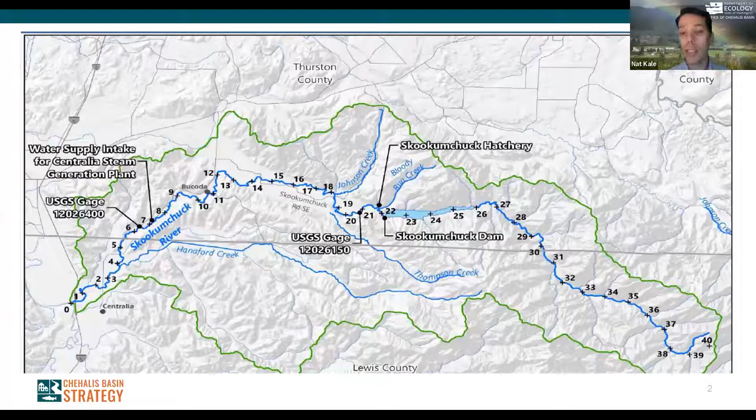So the Skookumchuck Dam is an earthen dam on the Skookumchuck River at about River Mile 22. It's approximately halfway down this 40-mile long river. The reservoir extends about 4 miles upstream of the dam, and about 10 miles downstream of the dam is the town of Bucoda, and another 8 miles or so downstream from there is the city of Centralia. The Skookumchuck Dam is really a delicate balance of 3 things: water supply, migratory fish, and downstream flooding.

The dam was built in 1970 for water supply. When it was built, it was to supply water to the Centralia coal-fired steam generation facility. That facility is shutting down their second and final turbine in 2025. Last year, TransAlta, the owners and operators of the dam and the reservoir, worked with the Department of Ecology to create a water bank. This allows them to essentially sell the water that used to go to the generation facility to other users, like the cities of Centralia and Chehalis, or other downstream consumers of water.

The Skookumchuck River has been home to runs of migratory fish for a very long time. Steelhead, coho, and spring and fall chinook all use the river. Back in 1970, when the dam was built, the then Department of Fisheries required mitigation for the impact of the dam on the fish. The two big things that they required were a hatchery and a fish passage facility.

The hatchery still operates and raises steelhead and coho. Adult fish passage upstream of the dam is done by truck. Recently, upstream transport has been intermittent, with only steelhead being trucked by the Department of Fish and Wildlife and only in some years.

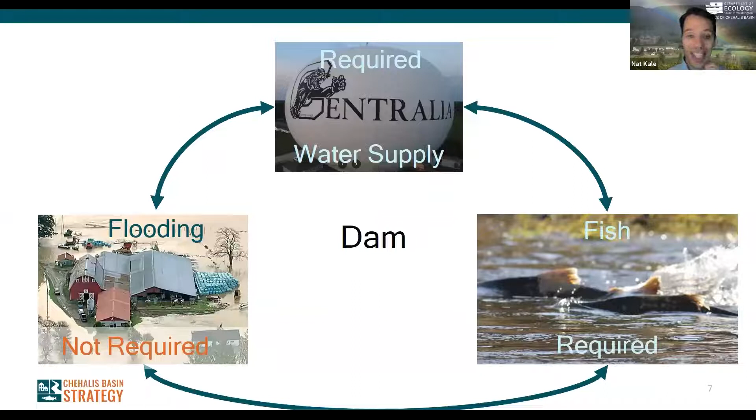So TransAlta operates the Skookumchuck Dam by balancing those three needs. They make sure there's enough water all year round to supply for their water rights, including their own rights. And they also make sure there's enough water and cool enough water for fish to use the river. And while the dam isn't operated for flood reduction, and it's not required to be operated for flood reduction, sometimes the reservoir is low enough in the fall that it does reduce downstream flooding.

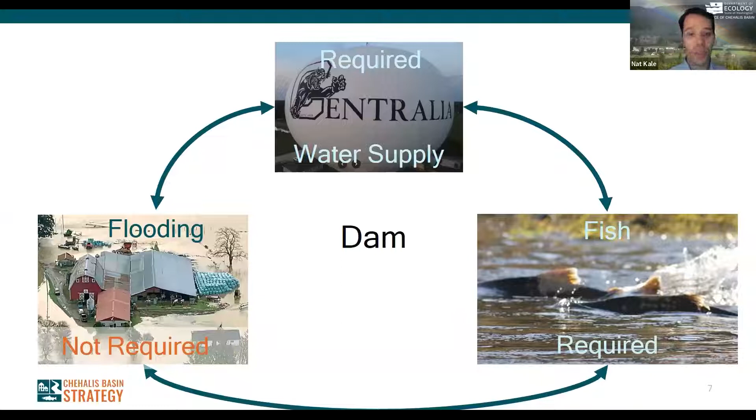The Office of Chehalis Basin, which I work for, is tasked with reducing flood damages and improving aquatic species habitat. Our goal with this project is to figure out how we can strike the best balance between these three things, reducing flooding in Bucoda, Centralia, and in between, while at the same time improving the river for Chinook, coho, and steelhead, all without disrupting that vital water supply the dam provides.

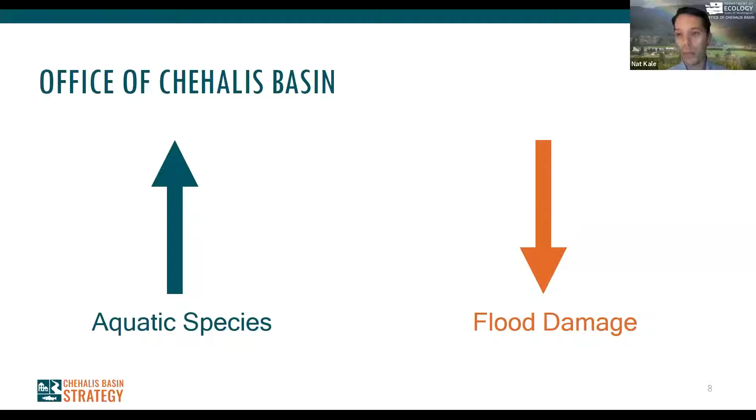Phase 1 of this study began back in March of 2021. We looked at historical studies of the Skookumchuck starting back in the 60s and gathered a lot of background information. Our focus was on getting a good understanding of the dam and on making short-term recommendations for the operation of the dam.

After we made a report to the board in October of 2021, we began phase 2 of this study. That's this phase. And for this phase, we've collected a lot more data and we're doing a lot more modeling. The outcome of phase 2 is going to be a report to the Chehalis Basin board, which should be done either late this year or early next year. That report is going to have everything we talk about today and a whole lot more. It's also going to have a few possible options of what we could do next with the dam.

I think it's important to say, I mentioned when I started that TransAlta owns and operates the Skookumchuck Dam, and they do plan to do so for the foreseeable future. They've been great partners with us on this project, and they're going to be the ones deciding what does and does not happen with their dam. So if the Chehalis Basin Board decides they want to move forward on a scenario for the dam, the first thing we'll be doing is going right back to TransAlta to start working on a mutually acceptable course of action.

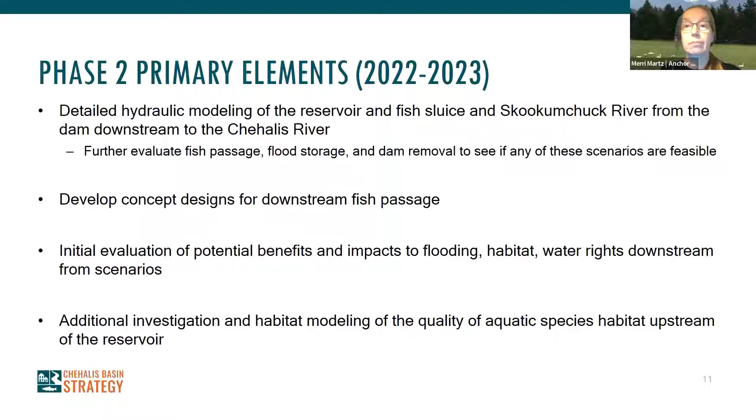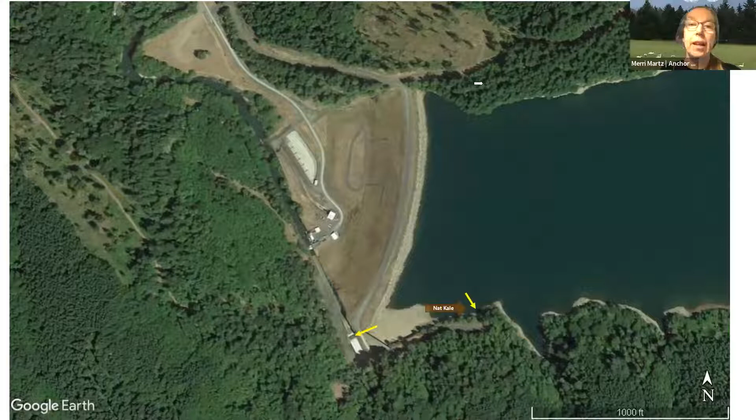And then the other arrow is pointing to the approximate location of a multi-level intake system that is the current way that basically all of the water discharges from the dam unless the reservoir is so high that it is spilling over the spillway. So that's basically the inlet and outlet system on the left bank of the dam.

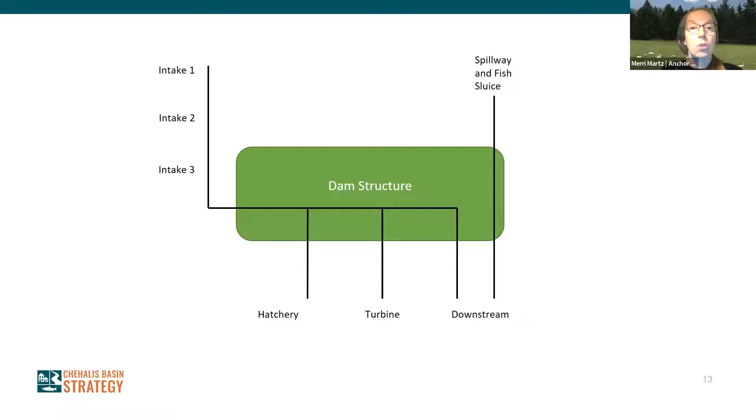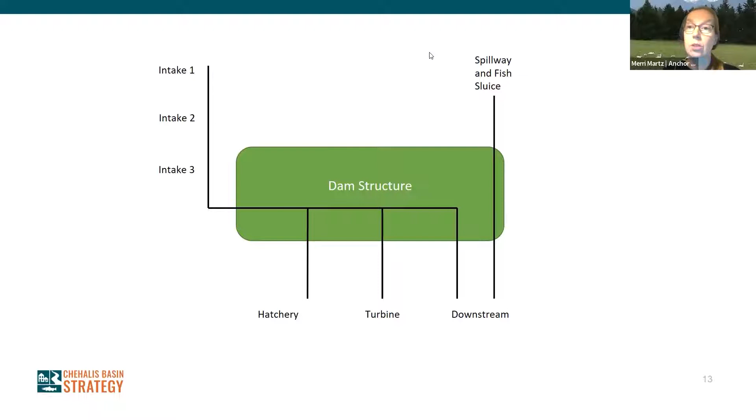And then there's this multi-level intake that can take water from various depths within the reservoir and discharge either to the hatchery, through the hydropower turbine, which is a small hydropower turbine, or to an outlet at the downstream end of the dam. So there's sort of three primary ways that water comes out: through this intake outlet system, or through the spillway and fish sluice, and all of the water that is discharged through these pathways enters the river downstream. Next slide.

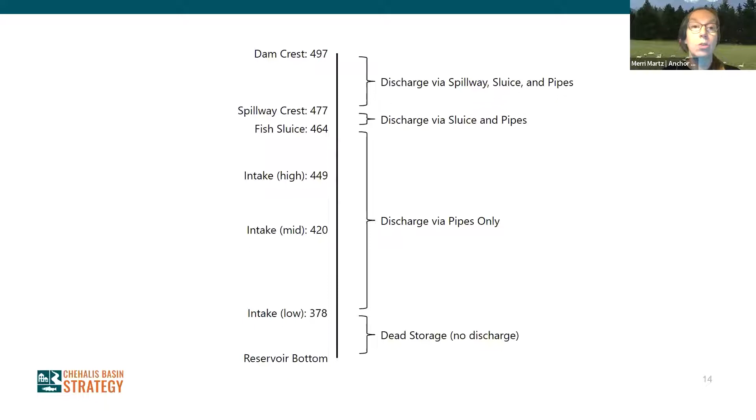The fish sluice that is built into the spillway has a bottom elevation of 464 feet. So when the reservoir is between the elevations of 464 feet and 477 feet, water can go through the fish sluice. When the reservoir drops below that point, there is no longer water going into the fish sluice, and so there would be no downstream passage once the reservoir drops below that elevation.

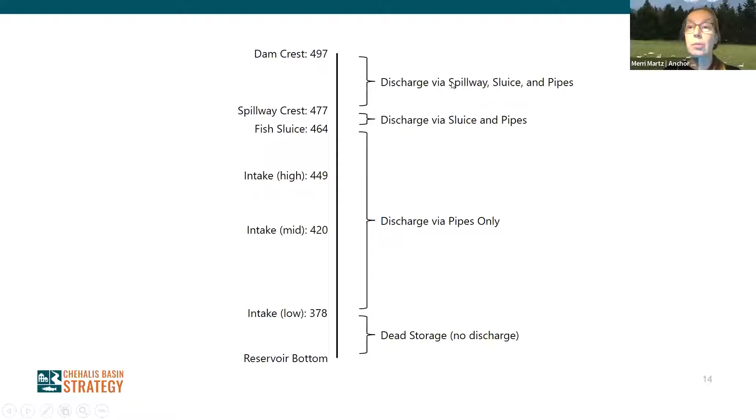And then, as I mentioned, there's this multi-level intake at various elevations, from a high down to a low at 378 feet. And then there is a bit of dead storage at the very bottom of the reservoir, below that lowest intake. Next slide.

So in phase 2, as I mentioned, modeling was one of the big elements of what we've been working on. And there were actually 3 different models. So there was a reservoir simulation model that allows us to route inflows coming into the reservoir from upstream through the reservoir and dam, and we can then analyze scenarios of different operations. So if there's X amount of flow coming in upstream, such as during a flood event, how could the reservoir store it and then release it downstream?

And same for fish passage. If there was certain flow coming in upstream, how long could you maintain elevation high enough to allow fish passage downstream?

We also built a 3-dimensional model for the fish sluice area in particular, because it allows a much more detailed look, because fish passage structures and fish that are using them are very sensitive to the velocities, potential eddies, and other things happening right in proximity to a fish sluice. And so it was really important to understand whether or not the existing or potential future fish sluice could be designed that would actually meet all of the state and federal criteria that have been designated that allow good fish passage.

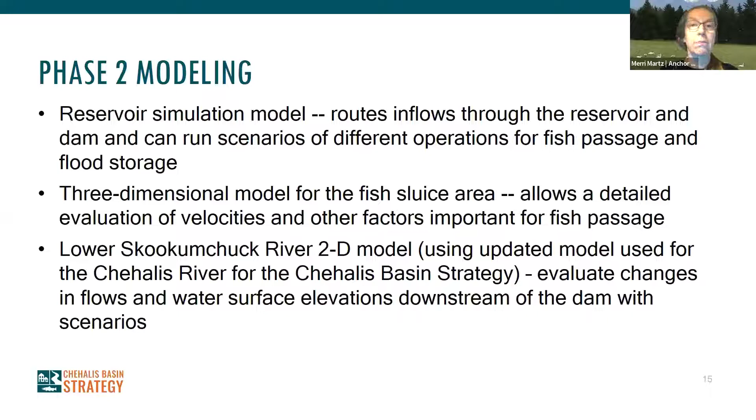So I'm going to focus now on the fish passage element. One of the first things that we have been doing in this year's study was to have several biologists evaluate the existing fish passage facility, the fish collection facility for adults. This was built at the same time that the dam was built, and it's intended to be used for adult fish collection and distribution, and the Washington Department of Fish and Wildlife operates it.

It's currently only used for steelhead, as Nat had mentioned, and what they do at this fish collection facility is collect fish for broodstock for the hatchery, as well as fish that are donated to various food banks in the basin, as well as potentially returning some fish downstream for additional fishing opportunities. And then they additionally trap and haul, in some years, adult steelhead upstream of the reservoir.

For its current purposes, it is effective. However, due to the size of the facility, if there were a lot more fish in the future that returned to the dam, and hopefully as part of the Chehalis Basin strategy there will be increasing numbers of fish in the future, there would need to be some upgrades in order to actually handle larger numbers of fish, or if we wanted to pursue passing other species such as coho and chinook upstream, there would also likely need to be some upgrades made. But for its current purposes, it is effective. Next slide.

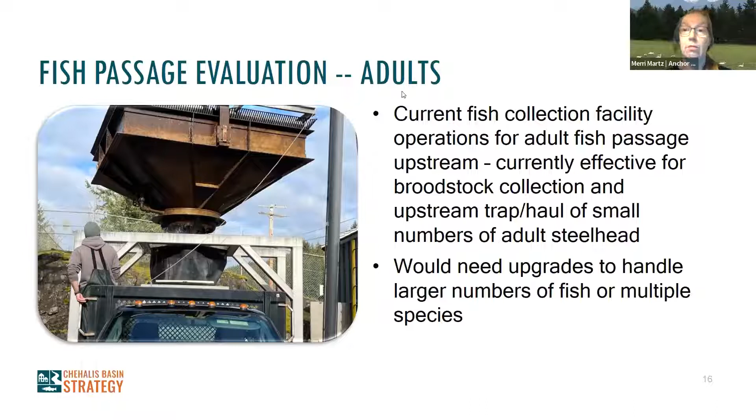So then focusing on juvenile passage downstream, coming from upstream of the dam downstream, we looked at the existing spillway and fish sluice. And this is a photo showing the downstream part of the spillway and fish sluice where they discharge into a long chute that returns through this slot back to the Skookumchuck River. And the current fish sluice does present some difficulties for safe passage. There's pretty high velocities coming out of the chute, depending upon what elevation the reservoir is at upstream. It's pretty turbulent. You can see all that white water coming out of the fish sluice.

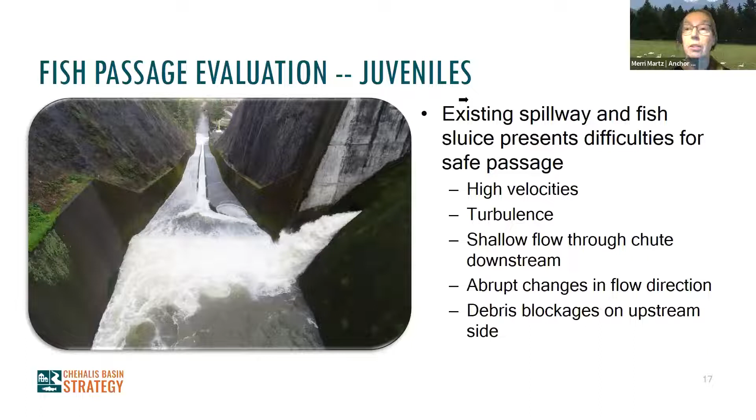And once the fish enter this chute that returns back to the river, there's very shallow flow. What is called in modeling is actually supercritical. It's really fast flow downstream. There are also some abrupt changes in flow direction as water comes out of the sluice and plops down into this holding stilling basin before it then goes into the chute. And depending upon the weather that year, if there are flood events that may have brought wood and other debris downstream from further upstream in the watershed, there could also be debris blockages on the upstream side that would reduce the ability of fish to even enter the fish sluice. So next slide.

So we looked at several options because the existing condition, while it certainly may provide some passage, definitely has challenges. So one option would be to modify this existing fish sluice. This photo is showing the upstream side of the sluice with the grating that is built into the spillway. You can also see in the foreground that there's a number of rocks and a channel that approaches the fish sluice. When the dam was originally built, this abutment was built into a bedrock bank slope, and this channel was blasted into the existing bedrock to allow a nice channel to approach the fish sluice. However, it does have some areas where there's possible eddies and fast flows that might disorient fish as they approach the fish sluice.

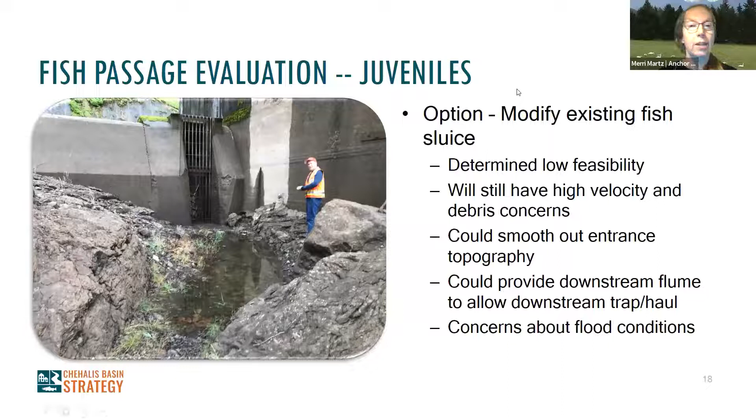And so when we were looking at the ways that this existing fish sluice could be modified, there's a lot of things that would have to actually be done. We could do some further blasting to smooth out that entrance topography, because to be most effective for fish to get into a sluiceway, nice smooth flows are the best way for fish to find their way through. We did also look at, if you did smooth out the top side, building something on the downstream end that would avoid having fish drop out in that fire hose situation into the stilling basin and chute. But that also poses some issues when water is spilling over the top of the spillway, that it could potentially damage what we're looking at downstream. The next slide shows a schematic of that option.

But as I had mentioned, when water is actually spilling over the top of the spillway, it certainly could hit this flume and might cause damage. And if there's debris being carried in the reservoir, that similarly could come over the top of the spillway and could potentially damage the flume. And so there are concerns about modifying the existing sluiceway, that there's a lot of challenges to that. So next slide.

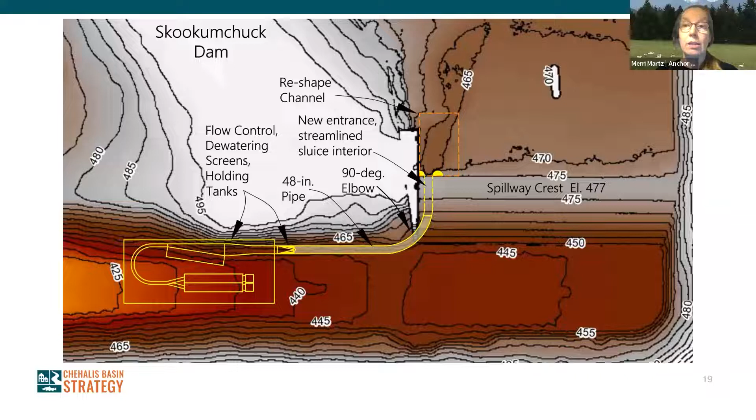So a second option would be you could build a new sluiceway that would be to the side of the spillway, which would eliminate some of those concerns about water spilling over the spillway and interfering with anything you're trying to do with the sluiceway. Similarly, it would require smoothing the upstream topography. It would also require boring a tunnel basically through the left dam abutment, which leads to currently some geotechnical and structural questions that have not yet been investigated, but it would require a new tunnel.

But based on the angle at which this sluiceway would go from the reservoir, we would be able to create better debris trapping and maintenance conditions. You wouldn't be right against the spillway, you'd be sort of to the side of it. And so you wouldn't have so many of the same issues with wood and other material coming through the spillway. And so this schematic shows a similar flume and holding tank, which is one option for how fish could then pass downstream via trap and haul. But there are other options as well. Next slide.

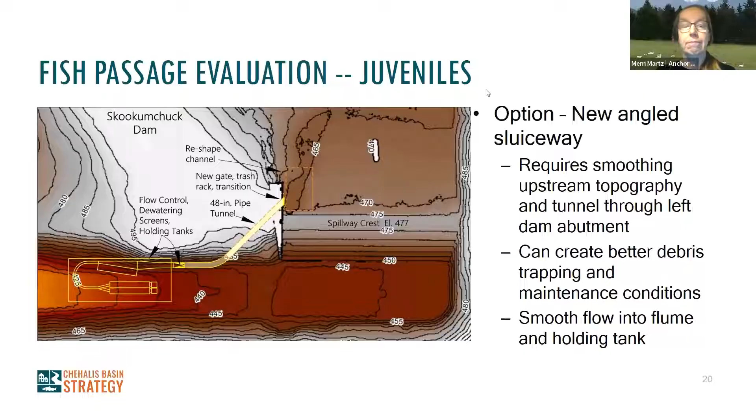So you could create a much longer flume that would just allow fish, once they entered the sluice, to continue passively downstream, just on their merry way through a flume system. This is used in many other dams, such as on the Columbia and Snake Rivers. There are long flume passageways that come out of dams, and they are highly effective. But you do have to drop down nearly 200 feet in elevation, and to meet current fish criteria, that slope of the flume cannot be particularly steep. It should only be about a 4% grade. And so it means that your flume to return back to the river is about 3,100 feet up to 3,500 feet, depending upon the pathway.

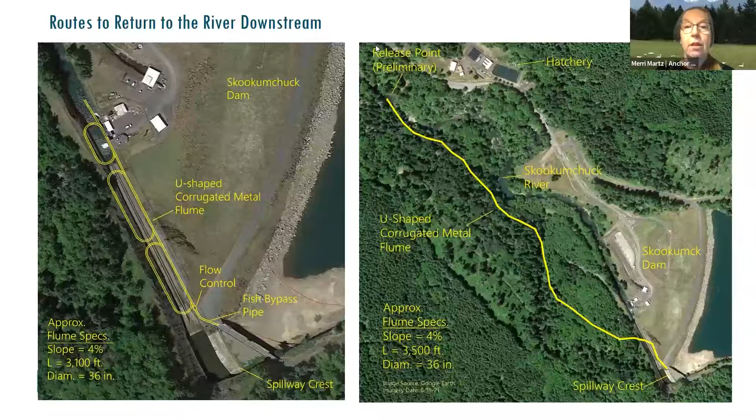So on the left photo, just showing a SketchUp of, you could do a helical way of turning and slowly dropping the elevation of the flume down within the existing chute, so you wouldn't have to go too far away from the dam. Or the second option on the right photo would be to create a flume pathway that returned all the way back down to the river downstream of all of the dam infrastructure. And that's another option. So next slide.

So using these potential fish sluice options, then there was reservoir simulation, and the three-dimensional modeling was conducted to identify, yes, could you actually make this happen, and what would be the effects? So for a fish passage only option, you would intend that much of the discharge from the dam actually goes through the fish sluice during the time period when you're wanting to operate it, rather than taking as much flow through the intakes and multiple outlet situations. So you try to keep the reservoir as high as possible and send most of the discharge through the fish sluice, so that you can have a longer period when it is passable for juvenile fish.

And so looking at this table on the left side, the left column, it says max discharge through sluice. So it's varying flows that we might consider passing through the sluice, from pretty high flows, 120 cubic feet per second, down to 25 cubic feet per second. And this was based on considering how much flow does it actually take to attract fish over to this corner? Like, how much flow would they actually notice and see a pathway downstream? Somewhere in this range would be sufficient to attract fish. In addition to discharging through the sluice, there is 20 CFS that is delivered to the hatchery pretty much all the time.

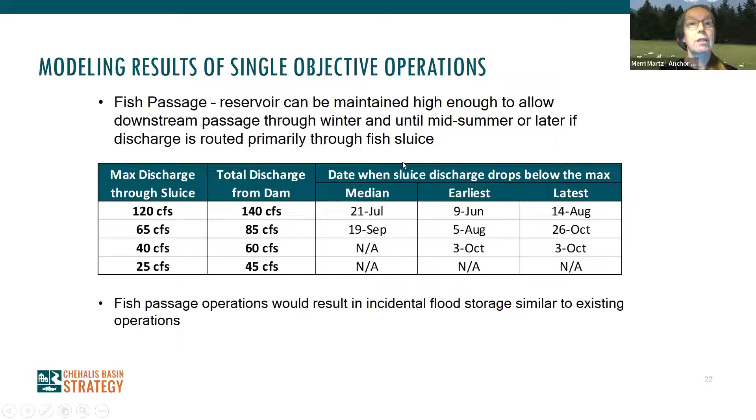So basically the takeaways from this analysis, and there will be some additional analysis to come, but currently, as I mentioned, the upstream passage for adult steelhead is effective, but there's clearly some upgrades that would need to happen to handle larger numbers of fish or other species. We have also asked another firm, the Whooshh firm, that operates those tube systems to transport fish over dams. They have also provided a conceptual analysis of what it would take to use their system to pass adults over the dam. So we're looking at multiple options.

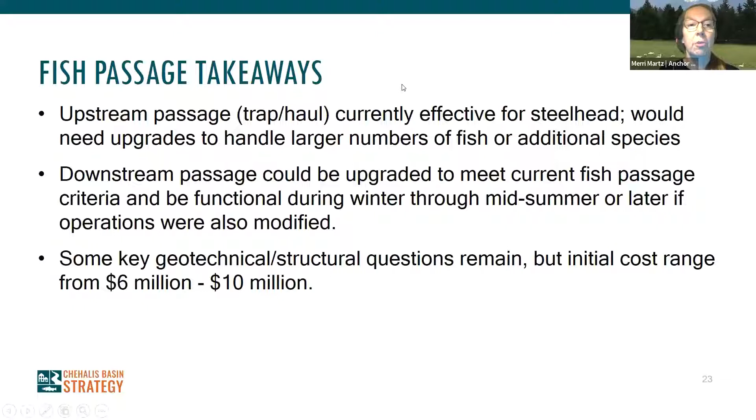Downstream passage could be upgraded to meet current fish passage criteria and be functional, basically from winter through midsummer or later, if operations were also modified. As I mentioned, if we proposed doing a new fish sluice through the left abutment of the dam, there's some key geotechnical and structural questions and concerns that would have to be investigated in a future design phase. But an initial cost estimate for a new sluice and flume system ranges from about $6 million to $10 million. Next slide. So with that, I'll pause, I think, for a couple of questions.

Yes, we have a couple questions going now. Our first question is, depending on the outcome of this discovery, would TransAlta entertain the idea of selling their dam and steam plant to the state of Washington to allow the state to manage this asset? Would you like me to answer that one, Merri? Yeah. The short answer is that option has not come up in our conversations about the dam or with TransAlta. So that's something that we would have to put to them and see if they were willing to entertain it.

All right. Next, we have, why hasn't the dam already been retrofitted with a more modern and effective fish passage system, such as those in place on many other rivers? Yeah, so the short answer is that the Skookumchuck Dam is not in the same regulatory jurisdiction and process that many other dams are in the state of Washington that are under the FERC process where they get relicensed every 50 years. The hydropower turbine that is present on the Skookumchuck Dam is small enough to be exempt from FERC licensing. The entire steam plant facility, which includes the dam to some extent, is under FERC jurisdiction, but Skookumchuck Dam has simply not had to go through some of the relicensing and upgrading and other considerations that a lot of other dams have had to go through in the past, because it's a little bit of a unique situation.

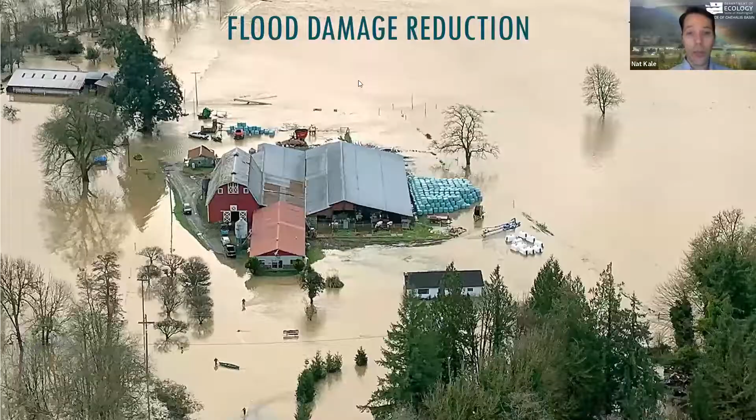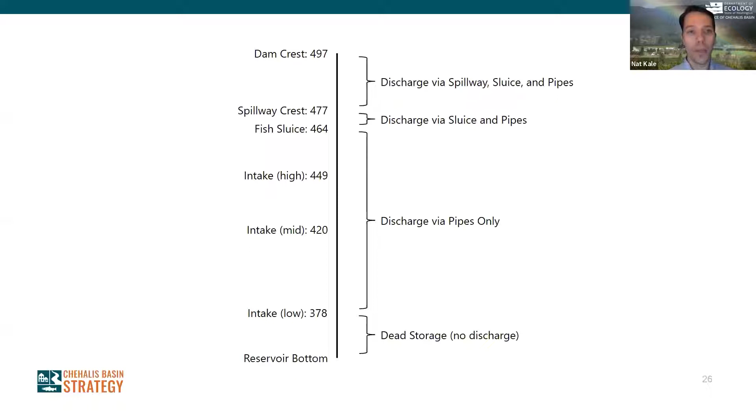At the Skookumchuck Dam, this means our goal for reducing flooding is to keep water from overtopping the spillway at 477 feet as much as possible. Basically, lower is better. We looked at both of the approaches that I mentioned to reducing flooding, increasing the reservoir's capacity and increasing the discharge capacity. And our computer modeling showed that a combination of the two would be the best way to reduce it. Now, in the past, the U.S. Army Corps of Engineers looked at increasing the height of the reservoir by adding gates or other structures to the top of the dam, and they found it really wasn't feasible to do that.

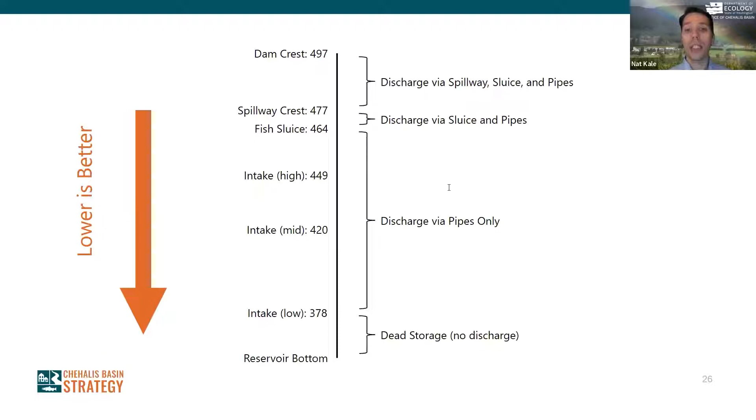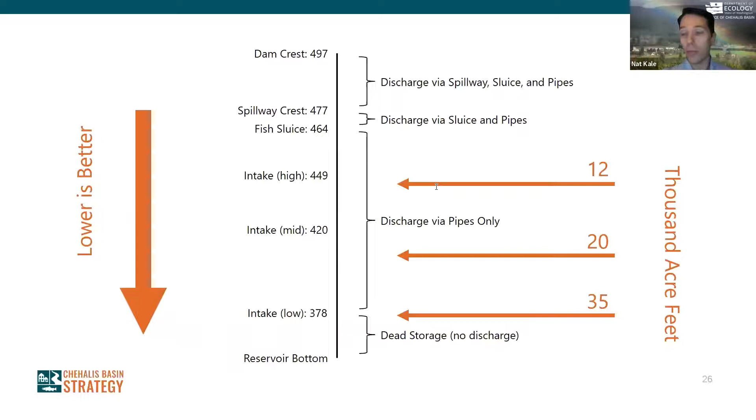So instead, we spent a lot more time looking at increasing the volume of water that the existing reservoir can hold back. We looked at 3 different capacities, and each of these corresponds to a different elevation in the dam. So those capacities were 12, 20, and 35,000 acre feet. And each of those volumes of water corresponds to a specific target elevation of the reservoir during the winter. So basically, instead of going up by building more space, we're going down by taking out more water. I'm going to be talking about acre feet a lot, so I'll just quickly give you this orientation here. An acre foot is just 1 acre of land filled up to 1 foot with water. So it's a lot of water. An acre is approximately 1 football field. So hopefully that's fairly easy to visualize.

35,000 acre feet is the maximum capacity of the reservoir. That's the volume between the top of the spillway, where the dam is no longer doing much, water is just running past it, and the lowest point at which we can take water out of the reservoir. That's called the active pool. It's the area of the dam that we can actually manage. 12 and 20,000 acre feet are obviously less than that, so those would be easier targets to meet. And what we found was that rain comes too hard and too fast in the winter for the existing pipes in the dam to keep up, even with our easiest target of 12,000 acre feet.

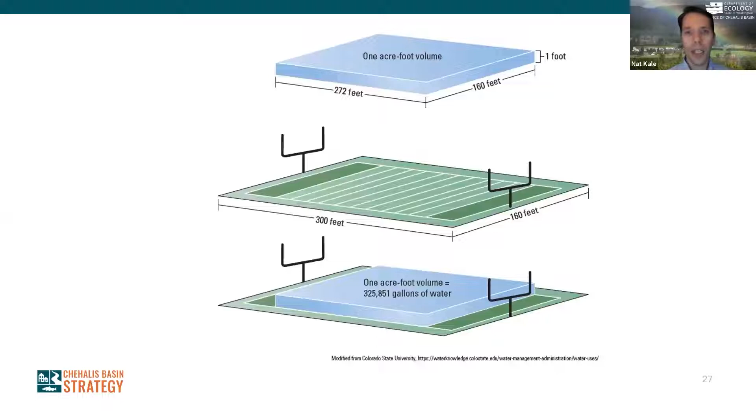And I'm just going to go through some quick flood math to back that up. I have a lot of numbers in my presentation, so I apologize for that for folks who don't appreciate that, but I will try to make them make sense. So we know that the reservoir can hold about 35,000 acre feet of water. We know that the current pipes through the dam can discharge about 600 acre feet per day. So that means that it takes about 55 days, or about 2 months, to fully empty out the reservoir. And that assumes that the pipes are open all the way and that there's no new rain coming in. And the numbers are, of course, more complicated than that, which is why we use computer models. But these are approximately accurate.

It takes about 2 months to fully empty out the reservoir. And as we know, nature does not give us 2 months of rain-free days after every storm. So to keep the reservoir low, we actually simulated running the dam with a succession of bigger pipes than exist today. Those pipes were 2, 4, and 6,000 acre feet per day. That's the discharge amount. That's how much water they can discharge at any given time.

And then we compared that to the reservoir sizes I mentioned earlier, the 12, 20, and 35,000 acre feet reservoir sizes. And then we ran 9 different computer simulations, one for each combination of pipe size and water storage. So basically what we did is we ran the last 15 years of rainfall through each of those combinations and looked at what came out of the dam.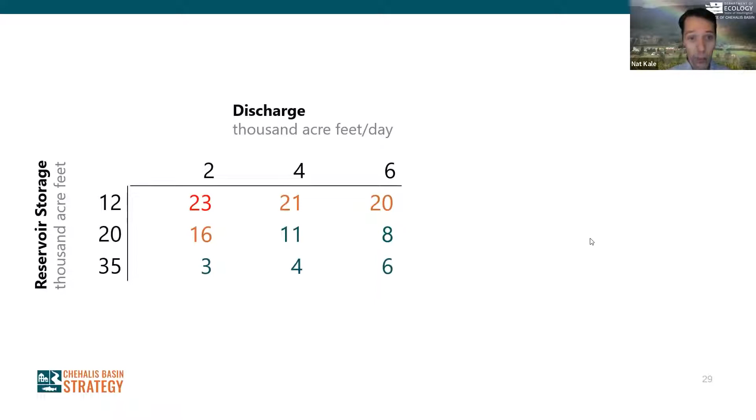This year, in January, there was some significant flooding on the Skookumchuck River in Bucoda. At the peak, on January 7th, that flooding was about 22,000 acre feet per day before it started dropping again. At that level, Bucoda was experiencing some significant flooding, as was Centralia downstream. Later, on March 1st of this year, the Skookumchuck River hit a lower peak of around 12,000 acre feet per day. At that level, there was some flooding, but in Bucoda and Centralia, it was mostly nuisance flooding. It was not a major threat.

Across our 9 scenarios, as you can see in the table here, we got numbers between 3,000 acre feet per day and 23,000 acre feet per day. So from no downstream flooding at all, up to pretty major flooding that exceeded that recent January event. The best scenario that we saw, the one that we felt represents the smallest intervention to the river while still maximizing the downstream flood protection, was with the 2 middle scenarios.

So that is to say, a 20,000 acre foot target storage capacity in the reservoir and a 4,000 acre foot per day capacity pipe. That scenario gives us about 11,000 acre feet per day maximum discharge, which is just less than that March 1 event of this year, so closer to that nuisance flooding scenario. Of course, to get this reduction, we would have to put a much larger outlet through the dam, which would entail major reconstruction. So the big takeaway here is that with a pretty major modification to the dam, we think we could significantly reduce peak flows downstream.

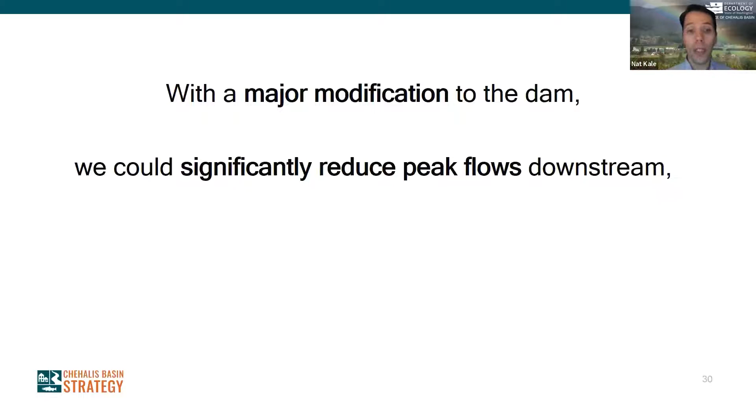Now, Mary spoke about the fish passage options, and I spoke about the flood reduction options just now. And of course, TransAlta has to keep a base amount of water flowing for water rights. With the computer models that we've put together, we were also able to simulate an operation model for the dam that balanced all three of those needs. As it turns out, we think that that same scenario that I talked about that reduces downstream flooding could also improve fish passage while keeping enough water in the river for water rights holders.

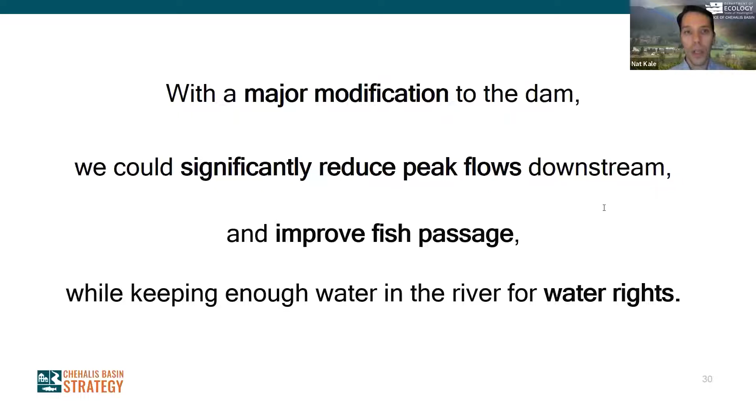So this is a challenge because the way that we manage the dam for fish and the way we manage the dam for flooding is different. As we've talked about, for flooding, of course, we want to keep the reservoir low, especially in the fall and winter. But for fish, as Mary mentioned, our goal is to keep the water up around the top of the dam, above that fish sluice, so that juvenile fish have a path to migrate downstream, especially in the spring and summer. And the way that we manage that is pretty simple. We draw down the reservoir in the fall and we let it fill up again in the spring.

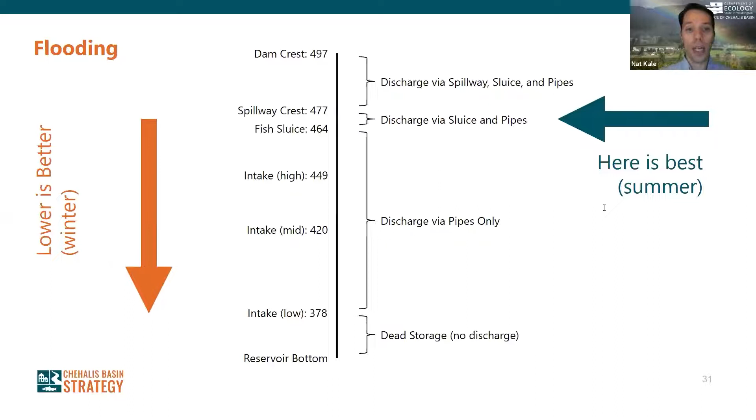There's a lot of variation, of course, depending on whether we've had a wet year or a dry year or when storms happen, all of those things. But this is the overall shape. Most years look about like this.

But with a larger outlet, we can change that around. We can let water out of the reservoir in the fall, anticipating the rains that are about to come. Then we can keep the reservoir lower in the winter during the wettest part of the year so that we always have the capacity to trap water when a storm comes.

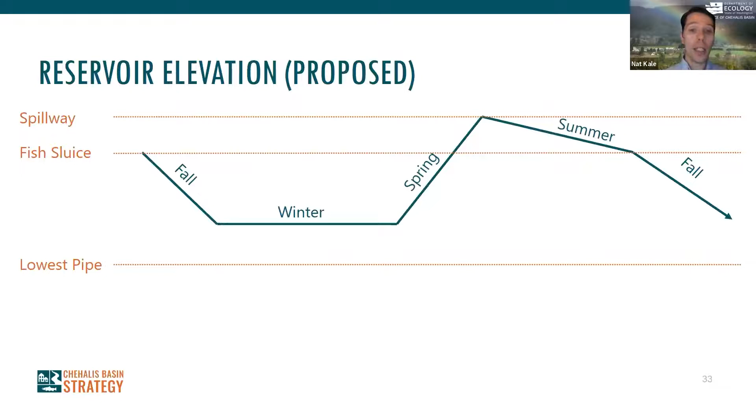In the spring, as the rain is tapering off, we can fill the reservoir back up so that by the time juvenile fish like coho and steelhead are looking to travel downstream, the water is high enough to let them out through the fish sluice. We keep it as high as we can all summer long while making sure there's enough water in the river for water rights holders before we draw it down again in the fall.

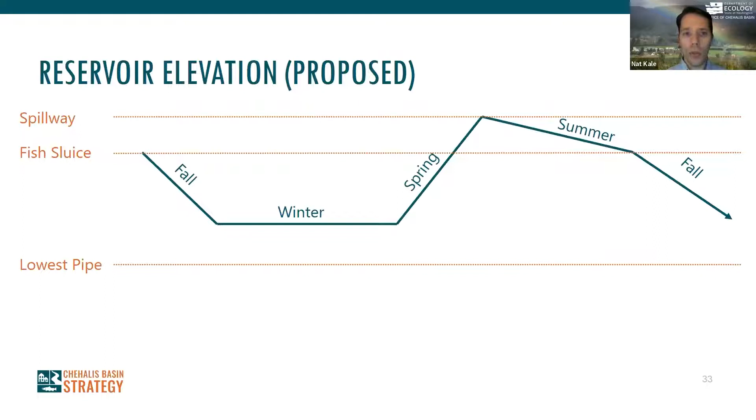Then the rain hits and the water elevation in the reservoir jumps up fast. If it's a big enough storm, the reservoir overtops the spillway, which lets a lot of water downstream fast, and that's when we see flooding. When the rain stops, the reservoir quickly drops back down to the elevation of the spillway, and then it starts slowly dropping again. You can see that for a long time after the storm, if another storm hits, there's little to no capacity in the reservoir to absorb it.

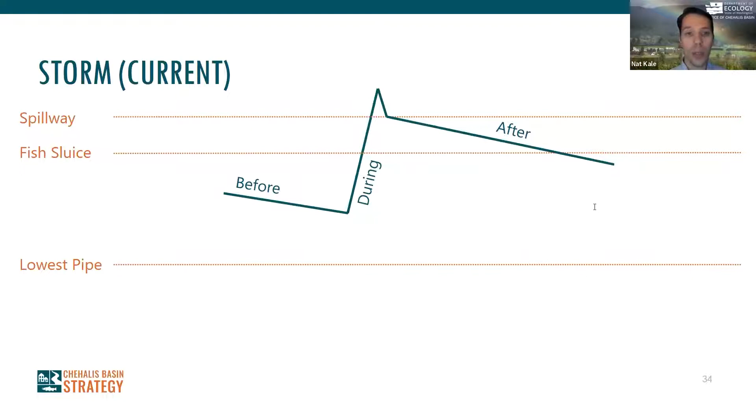An obvious question when you're looking at this is, why don't we just draw the reservoir down as far as we can? There are a couple of reasons for that. First, we want to make sure there's enough water in the reservoir to keep water flowing for water rights holders all year long. And second, later in the season, when we start getting towards the spring, we need to make sure there's enough water in there so that when the rains taper off, we can still fill the reservoir back up to the top for the fish.

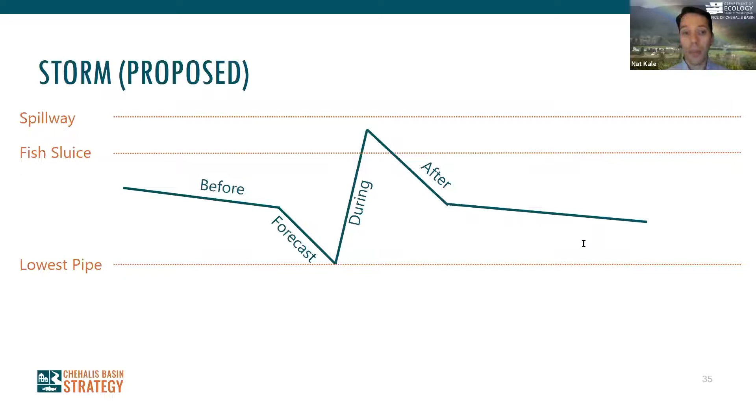So going back all the way to the beginning here, we talked about three things that we needed to address with the Skookumchuck Dam: water supply, flooding, and fish passage. And what our computer modeling is showing us is that we might be able to address those with a pretty major physical change to the dam.

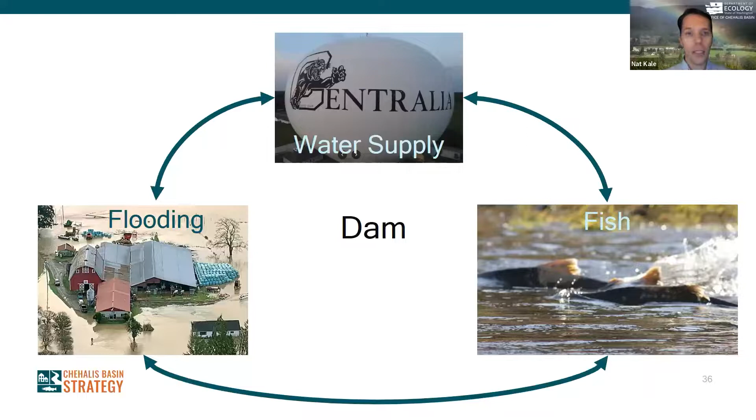Starting back earlier, what was the volume and species of fish in the upper river prior to the dam? Yeah, I don't know those numbers off the top of my head. There was an old study produced by the Department of Fisheries at the time that estimated the habitat capacity and the number of spawning fish that could use the area upstream of the reservoir.

But I do want to mention that there had been 3 splash dams present on the Skookumchuck River for decades, from the late 1800s until about 1940, which probably significantly modified the fish species and their presence and distribution in the Skookumchuck River prior to Skookumchuck Dam being built. So some of that old information is very helpful, but is maybe not entirely representative of how much capacity there really is upstream of the reservoir.

All right. Why are steelhead hauled over the dam only occasionally by DFW?

So part of the mitigation requirement initially with the dam, as mentioned, was to build the hatchery and to transport adult fish over the dam. And so for many years, steelhead were hauled over the dam, and that was the only mitigation requirement was for steelhead, not for other species.

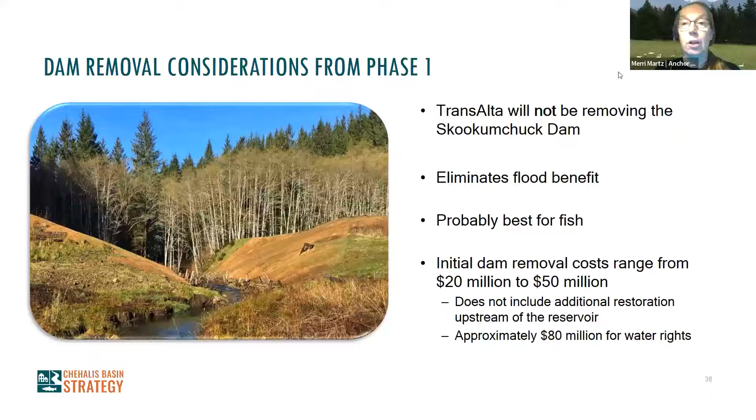And it also does not account for the fact that if water rights are lost downstream of the dam, there would be a need to mitigate and or possibly compensate folks for water rights, which could be many millions of dollars as well. So next slide.

So the remaining work to finish out this phase 2 study, which is going to be happening over the next couple of months, really is evaluating the potential fish benefits of the scenarios. We've been talking about hydraulic modeling all tonight, and we haven't talked about fish benefits. And so that's actually happening right now through the EDT model that was also used for the rest of the Chehalis Basin strategy, including the aquatic species restoration plan. So we will be updating that model with these scenarios to understand how much benefit there really is.

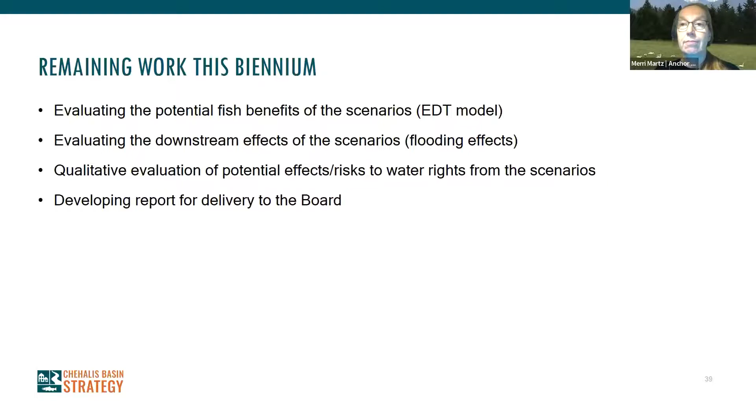And then also evaluating the downstream effects of the scenarios, flooding effects in particular, as well as a more qualitative evaluation of the potential effects and risks to water rights downstream from the scenarios. And then wrapping this all up into a report for delivery to the board on the schedule of approximately December or January for completing all of that work. So I think with that, that was the end of our presentation. So now we do have time for more questions.

We have quite a few questions, so. All right. Who are the water rights holders?

That's a great question. So right now, TransAlta still effectively owns their water right. They set up an agreement with the Department of Ecology to establish a water bank. And what that allows them to do is sell mitigation, which is a confusing term in this context, but mitigation for new applications for water rights downstream of the dam. So if somebody, like a city, wanted to pull out more water for their residents, for an industrial use or for irrigation, they could first ask TransAlta to sell them a mitigation right, which the Department of Ecology would confirm.

And then the Department of Ecology, once they'd confirmed the mitigation, would go through a process for establishing a new water right. So the short answer to that question is right now it's TransAlta, but in the future there may be more. And I should also mention that there are other water rights holders along the Skookumchuck. They're much smaller than TransAlta, but they exist and they are of course important. So it's not exclusively TransAlta.